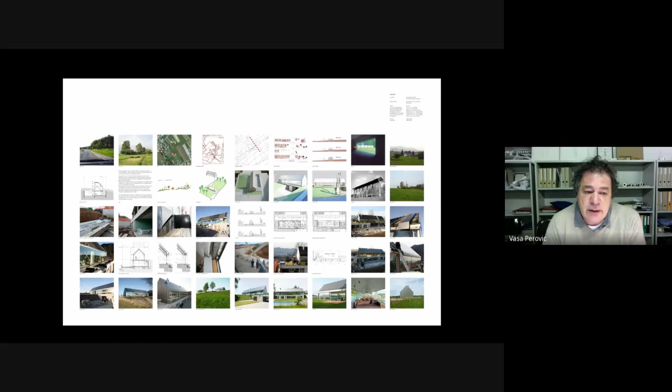For example, in the case of this house, if you see my cursor, there was this series of thoughts we had as we were developing the house, all these references, that we were actually sitting on the site. And here in the lowest right-hand corner there's an email from a person in Alaska asking us for the project because he would like to build the same thing there.

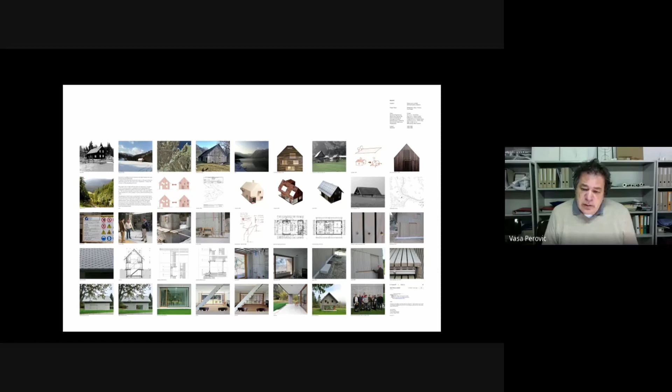So in a sense we were trying to show that the complexity of a project, communicated through a singular image, is much, much bigger than this one single image to which we are confined in the media.

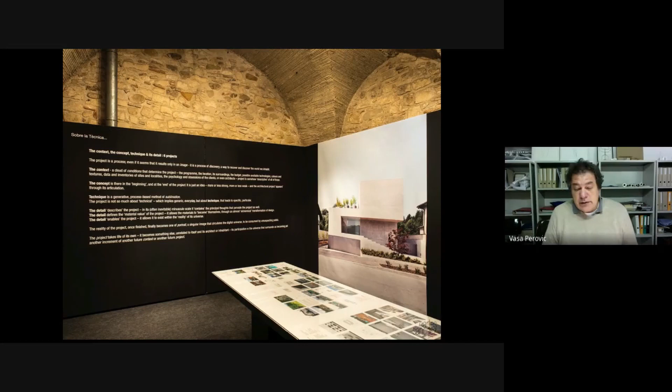On top of that, this is a house on the Croatian coast that we did. We wrote a short text called The Context, the Concept, Technique, and its Detail, and 6 Projects, where we explain our idea of context, concept, technique, and detail, and how they relate to each other and contribute to the idea of producing architecture.

The work of architecture is finally a relatively complex set of relations between these technical things and the atmospheric things that we somehow produce with our projects.

We've run the practice for over 20 years now, 22 years. If I do a little scientific autobiography, in those 22 years we have changed 5 addresses.

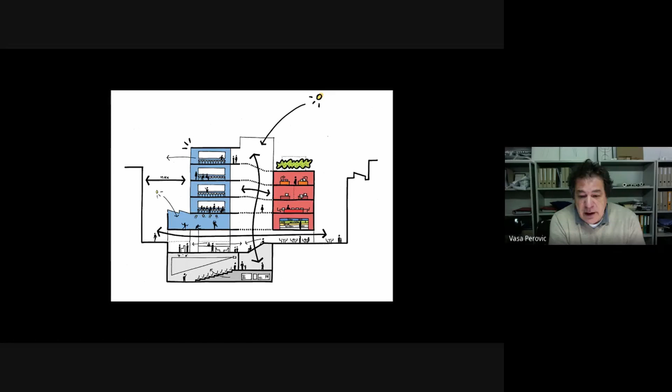It's a building for the pedagogical faculty of the University of Brussels, which has also been finished now during COVID. I managed to dig up 2 or 3 photographs today to show you. It basically consists of a red building, the old brewery building which was a monument we had to reconstruct, and the blue building is the addition. Away from the street level, very much underground, are the auditoria of the new building.

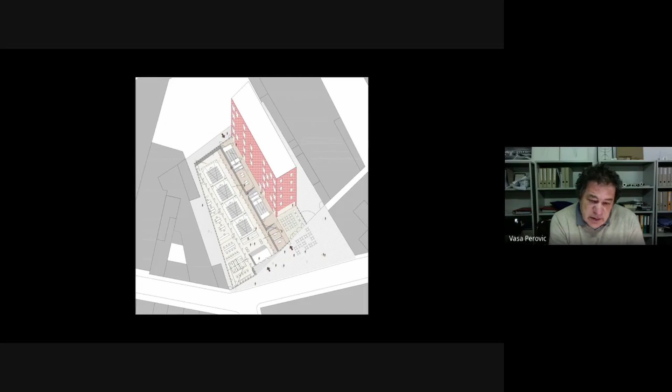The idea of this project was, in a very difficult neighborhood—this is more or less the neighborhood where all of the terrorists in the recent Brussels terrorist attacks come from—to bring the school in as some sort of connecting element within this rough and difficult neighborhood. Here you see the cutout of the ground floor, where the cafe of the school becomes the cafe of the neighborhood, and the complete ground floor of the school is fully open to the street.

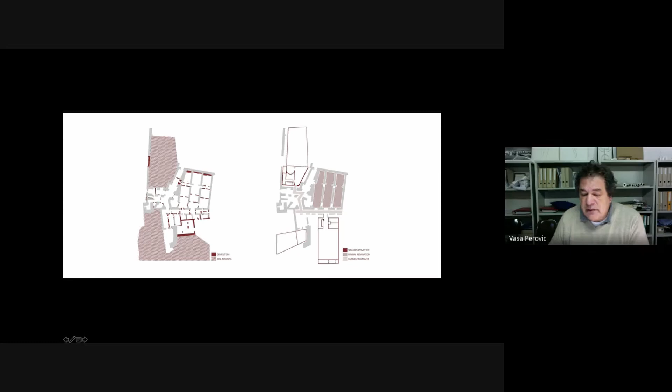On the right-hand side, you see our interventions, where we basically proposed to clean up the medieval constructions, to establish a kind of exhibition spaces, to provide an entrance zone which would help where you would enter from the center of the city, and then to provide a kind of small pavilion and art. It's kind of a Kunsthalle space in the back in the park.

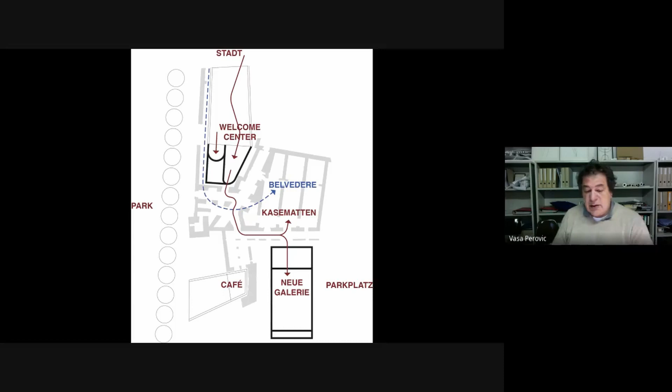So here it's shown in this diagram, because I think diagrams are easier to perceive than the actual plans. From the city you go into the welcome center, then into this underground Kasematten, and then you end up in a kind of Neue Galerie, or this kind of Kunsthalle space in the back.

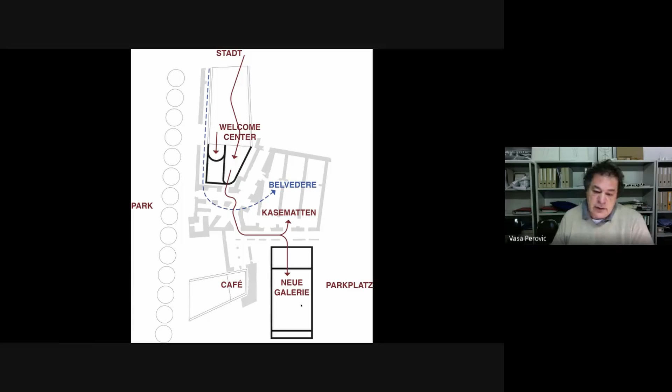At breakneck speed, combining it with the archaeologists on site, we won the competition, and over a period of 1.5 or maybe a little bit closer to 2 years, we constructed the entire project. As the old construction was brick and stone, everything that we added ourselves was constructed in concrete.

So this is the welcome center, so-called welcome center, the entry hall, and the shop that faces the city. There's this sloping surface that takes you into the building, basically from the level of the city to the level roughly 2 meters underground, or 2.2 meters underground, on the level of the old Kasematten.

There is this huge concrete kind of funnel which brings you from the city into this door in the back. This is our office visiting the building when it was opened. It's a concrete construction with this kind of top light. And as you enter into these huge storage spaces in the back, these were the storages where carriages with horses were entering.

So they're actually huge, it's a complete Piranesian maze, an underground maze of these enormous, complete streets covered, formerly underground, now they've become part of the city.

So this is a kind of very large exhibition space. If you see this ugly lamp in the front, that's actually the device that controls everything. As you can see, there are no fire alarms, nothing on the ceilings of this protected space.

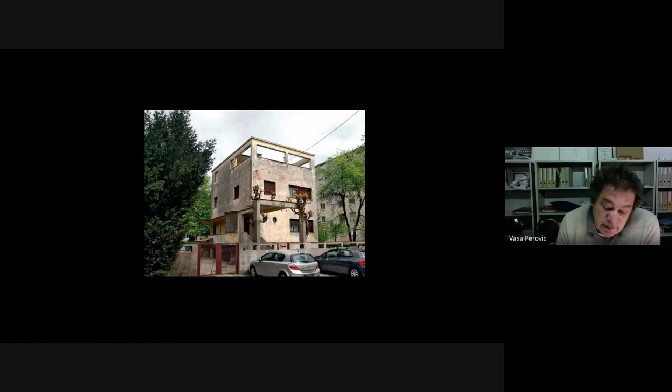This kind of radical example of modernism is one of the most beautiful houses in the neighborhood. So our tests for the site were oscillating in between the traditional villa that we actually demolished and the modernist neighbor that was somehow our referential point.

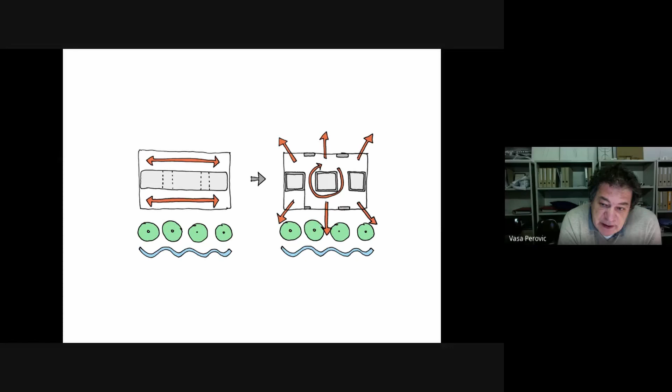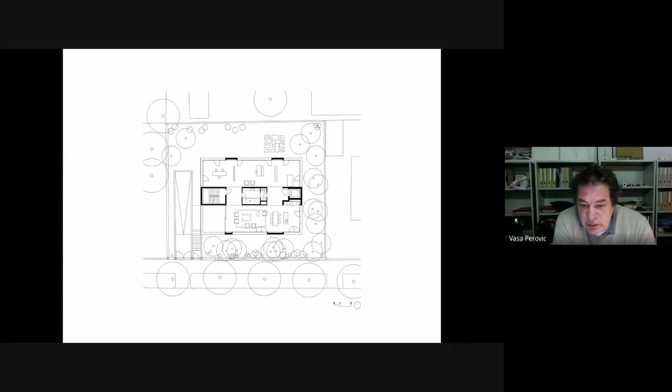In a sense, the building would have this kind of external structure. So the structure of this building is the elevator, staircase, and these 4 short walls, or columns if you want. And this is the floor plan of the apartment. There are no rooms, as you can see. It's just 2 large spaces connected together, including the terrace.

So this is the apartment of Tadej on the ground floor. He has absolutely 0 walls. This is the apartment that I have on the 1st floor, and as you can see, I have a separate bedroom from the workspace, and a space for guests to sleep, and then the living areas on the front. Mattia, my partner, on top, has a kid's bedroom because he has kids.

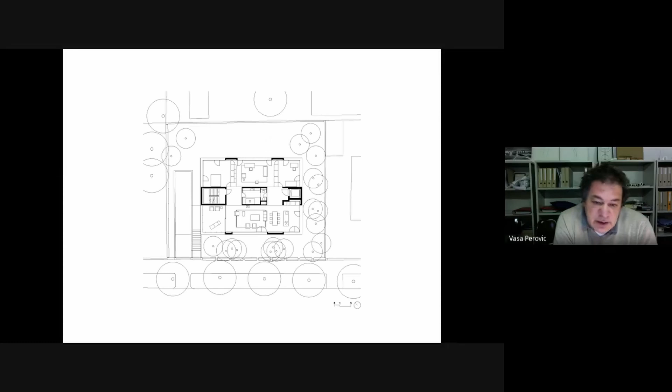He has a kid's bedroom and his own bedroom on the 2 sides, but as a partition element, we have used this kind of cupboard system that we devised for this project. On top, we have a kind of roof, which was supposed to be a common roof, but now is practically used only by Mattia.

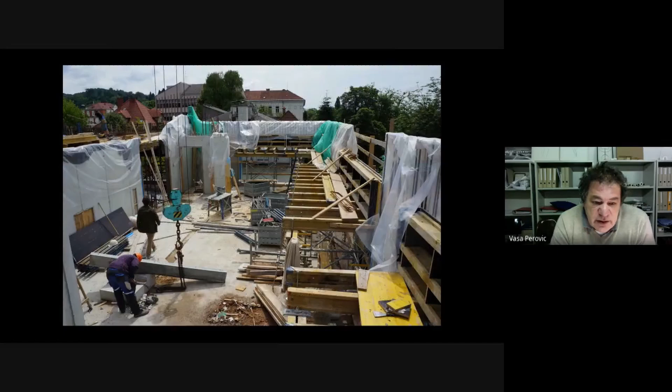Of course, you start from this idea of this kind of perfection of a piece of architecture, where you enter from the basement, but of course the reality of the construction site is a bit more like this - trash and garbage, and a huge effort to construct an architectural idea or statement.

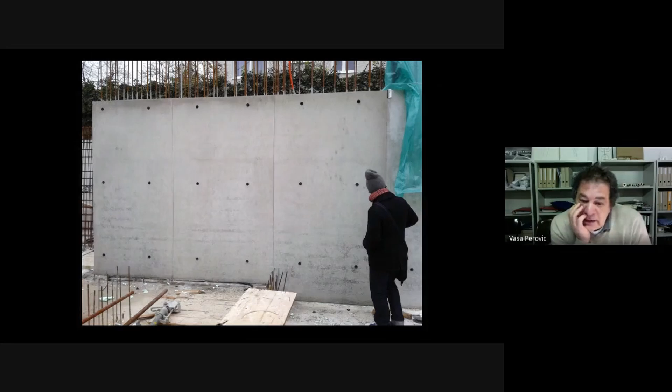This is Mattia inspecting, who has obsessive compulsive disorder, so he's the OCD person of our office. He's inspecting a concrete wall. We did experiments in the basement of the building with different ways of casting the concrete in order to get to the point where we are satisfied.

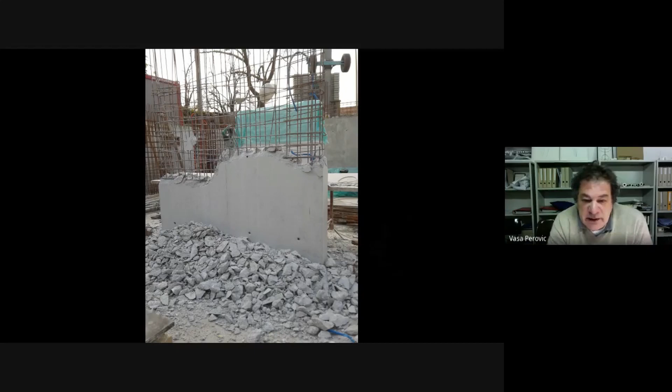And this is how a lot of these experiments ended. So 5 minutes after Mattia inspected it, it was demolished. It was a continuous effort combining demolition and construction in order to construct the building.

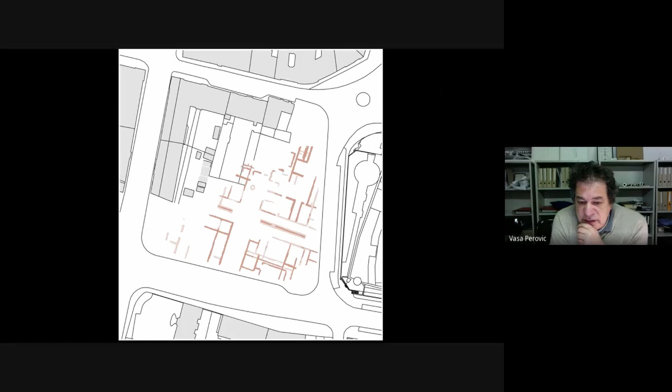You see the crossroads of Cardo and Decumanus in the space where we were supposed to construct a new library. Here you see how our library sits on the corner, and on the right-hand side on top you see Plečnik's library and reading room, which is more or less exactly the same space as the reading room that we have proposed.

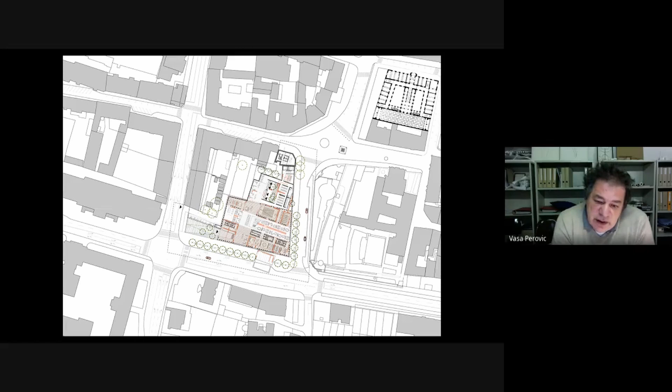What we proposed to the city was not to make a museum of archaeological excavations underneath the new library, but basically to start a new library underground. So to start with two squares, not a defined city block, which bring you down to level -1, the level of the Roman city, and to install the programs of the library into the remains of the Roman city, constructing the entire new building around this idea of Cardo and Decumanus, and around the clashing between the geometry of the Roman city and the geometry of 19th and 20th century Ljubljana.

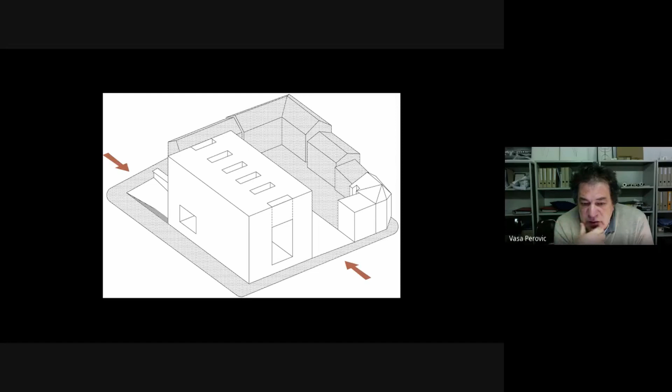So this is what it more or less looks like.

This is the new basement, Cardo and Decumanus, basically the square that folds down and enters into Cardo, and the Decumanus becomes the main reading room of the new library. We inserted the concrete walls and foundations in between the Roman excavations, so they will be completely preserved in situ, and they define the geometry of the new library space.

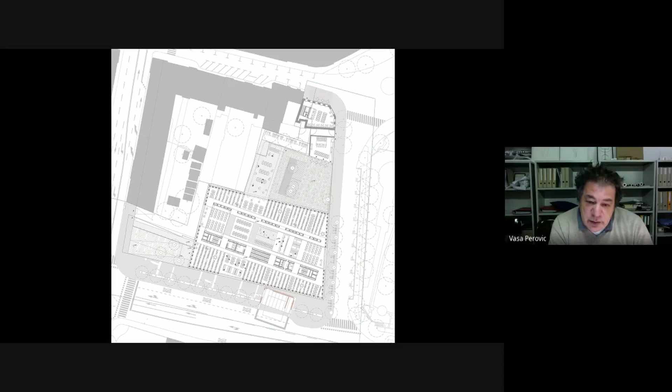This raises a lot of issues because the building follows the regulation of 19th century Ljubljana, while the internal and organizational structure of the building follows the Roman grid. Those two grids create a building with dynamics very difficult to reproduce, or let's say, if you wanted to design them, it would be impossible.

Here a typical floor with the reading rooms and library spaces, and here the section. The top floors are the storage spaces, because you can't dig under archaeology to store the books. Now we are canceling these floors and the technical facilities.

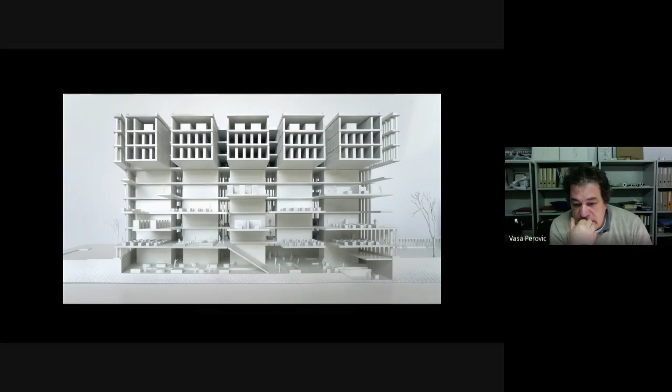You see how the light will come down into this vast new reading room, which is no longer formally defined as Plečnik's, although it's exactly the same dimension, but is more a complex, a bit Piranesian space. We were interested in this work when we were working on this competition.

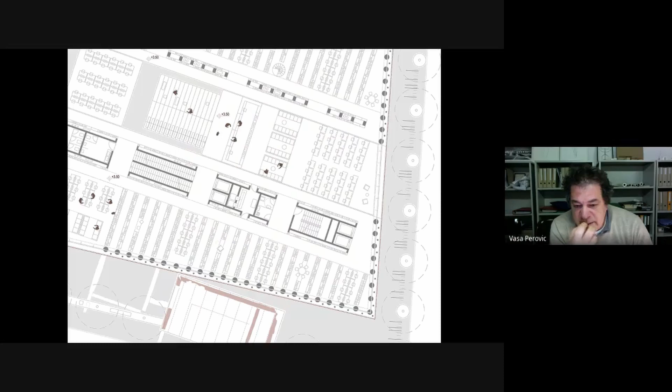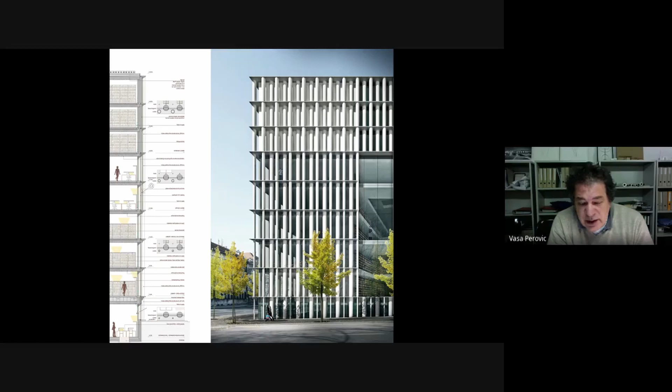The new library is in fact a very repetitive construction of wall-columns, a series of columns which, one next to another, define the structure of the library, falling somewhere down in between the Roman excavations, and also defining the facade and window structure of the library. This dense forest of columns, which creates walls and windows, is going to be at the same time the only structure of the whole building, apart from the two structural cores, and also the facade of the new building.

By diving underground into Cardo, you will actually become part of the Roman city, but also part of the 21st century city. Coming from two different sides, you will always identify this big reading room, similar to the identification of Plečnik's reading room. Here you see how the two buildings are going to relate to each other.

This project is now, of course, what I'm showing you is one of the earlier phases. This project is now in the final phases of design, but especially due to the COVID crisis, I don't know if the government will have money to construct it.

Architect as temporary locals. This is basically the condition we have had since 2008, when we started working outside of Slovenia. We are never really local. We always try to assume, try to understand, try to have a reading of the locality, of the local context or understanding of the local place, in order to construct every single project. It's a continuous amateur-like situation where you are stressed and faced with a situation you haven't seen before.

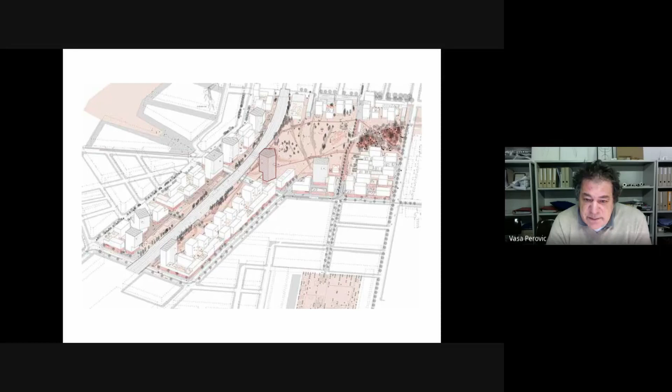So we designed the Snow White, and then there are also however many dwarfs were in the book—7 or 8 or however many—which are the towers on the other side of the railway tracks. We won this. This was a big international competition, and we won it a year and a half ago.

So we wanted to move away from this idea of a generic tower appearance in the city and instead adjust the tower to the kind of views it has over the city. Since it's going to be one of the tallest apartment towers in the city of Vienna, we tried to identify the important views that would be possible from different heights as you go up the building.

We tried to give form to this irregular diamond-like shape of the site—following the diamond idea but orienting it towards particular points in the city landscape. This, in retrospect, gives you the cuts in the middle, allowing us to shape the tower in a way that renders it less intrusive, in our opinion.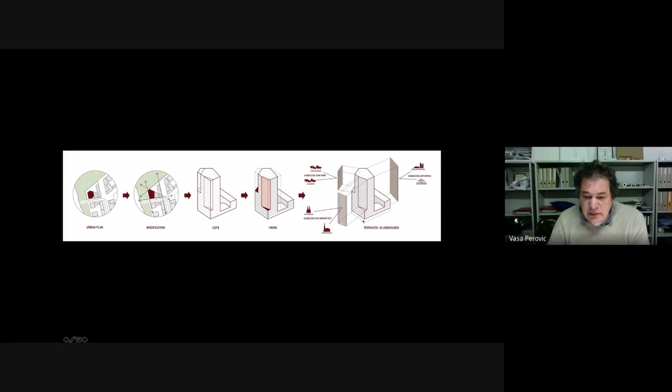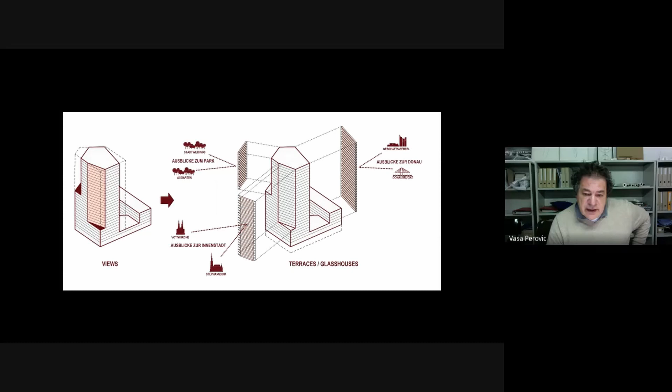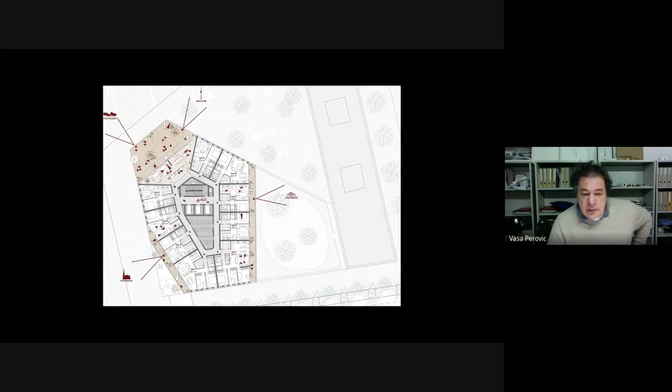The second floor, where you see the pink stuff, is the common spaces of the entire building. As you go up, you start cutting the building, getting more common space each time, and the floor plan becomes smaller as you go toward the top.

This results in a series of very specific apartment typologies. In general they're simple, but also complex as you progress up the verticality of the tower, giving a lot of diversity—the whole building is around 230 apartments.

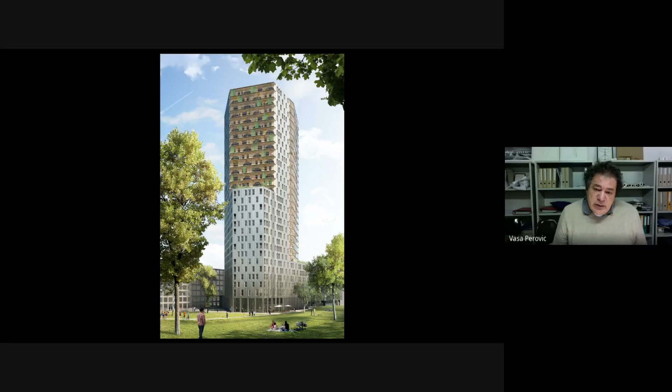This is the way we combine these two different aspects: one is the domesticity hidden in this tower, and the other is a brutal, rudimentary aspect reflected in the repetitive metal facade of identical openings. Every time there's a living room with these big cuts, there are also big arched windows—at the time we won the competition, we wanted to construct them in wood, with large wooden arches projecting the domestic space hidden within the tower toward the views of the city.

And if you turn around the building, the fact that we're changing these facades also makes the building look more elegant and more slim overall.

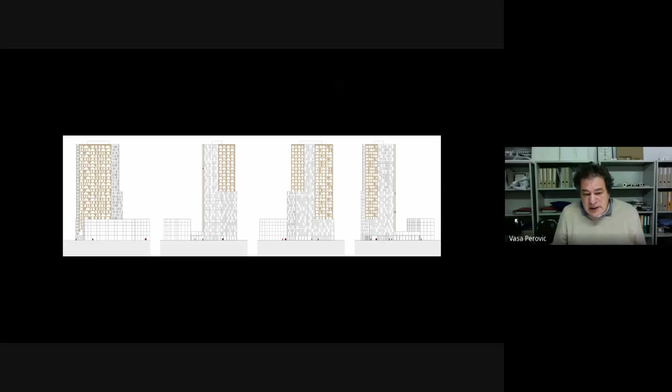So in a sense, you're not going to be so much aware of the massiveness of the entire building, because it's going to be materially broken into two. So here you see how these two different facades somehow come together around this domestic facade, which is basically a series of glass houses.

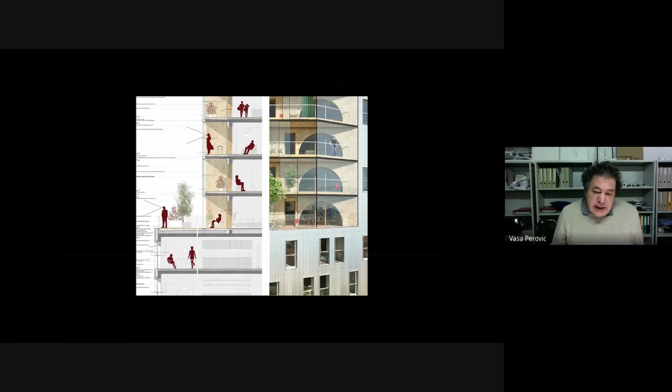Of course, the wood is now becoming a huge problem because of fire regulations, so this is still a theme under discussion. The metal parts were also under discussion because the client thinks it makes the building look very poor. But I think we've gotten to a point where we're going to construct the building more or less with this proposed image as it is.

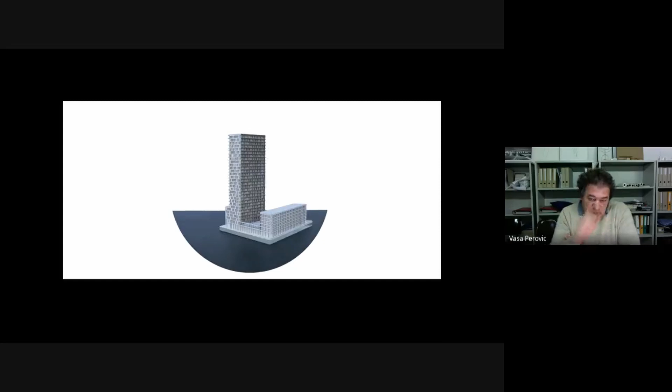So if you turn around, this is the tower. We are not designing this lower building, it's designed by VLST, the urban office that won the urban competition. They got that commission, and we are working together on basically the entire project, with this kind of strange, site-specific or view-specific tower we're trying to construct.

Which brings me to another, maybe final project for today. Another project where, as Henrietta mentioned before, the architect is a permanent amateur as a subject. It has to do a little with what I was saying before, that we need to know a lot of things, a little about a lot of things. This puts us in a situation of being a permanent amateur, which you can see as positive or negative. We try to see it as positive, because Matija and I always enter a project with a very open mind and a research-based mind.

This is a project that took us 6 or 7 years to construct since we won the competition. It was a very big international competition for a mosque and Islamic religious and cultural center here in Ljubljana. It's the first mosque in Slovenia, and probably for a long time it's going to be the only mosque in Slovenia. The Islamic community had been trying to build a mosque for already 40 or 50 years.

When we started design, it was 40 years. Now, when we finished the building, it's almost half a century. And they were always refused for different reasons, even in socialist times.

Finally, they managed, with the mayor of the city who is in a way progressive, to obtain a plot of land very near the center of the city, but in a kind of no man's land. You can see it here, it's an industrial area which is still going to be constructed in the future, stuck between the railways. This is the center of the city of Ljubljana, so very near the center, but also some sort of alienated island stuck between leftovers of infrastructure.

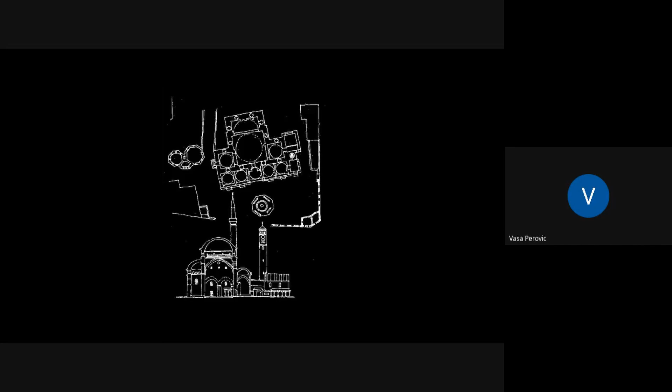There was a historical mosque in Slovenia, somewhere high up in the mountains, constructed in 1916 because a lot of Bosnian warriors were fighting in the First World War. For a long time it has disappeared, but you see it's some sort of a merger between a traditional house at the bottom and the mosque on top. So in a sense, something that already at that time tries to bridge the cultural divide between the.

There was also a Slovene architect studying in Prague, Czechoslovakia, named Dušan Grabrijan, who researched a lot of this Islamic architecture and compared it to the Corbusian approach of construction of space in modernist projects. These were all the influences that brought us to construct this kind of new mosque complex as some sort of a center open to the city, but still separate from it, that would invite different construction to happen around it over time.

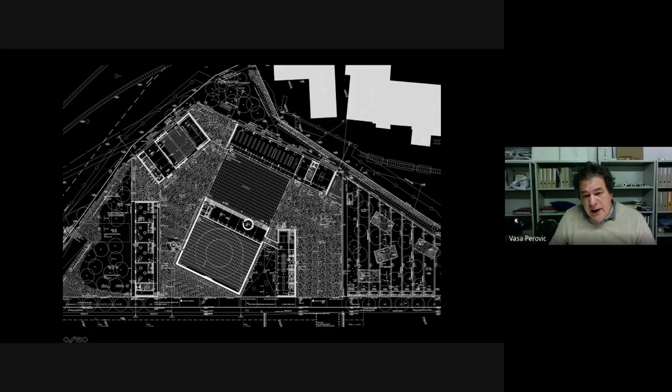This is the space of the mosque, and this is the direction of Mecca. There's a little kindergarten on the ground floor of the building reserved for apartments, a lecture hall on the ground floor on top of an office building for the Islamic community, and a school building which on the ground floor has a big Islamic library and a small shop space.

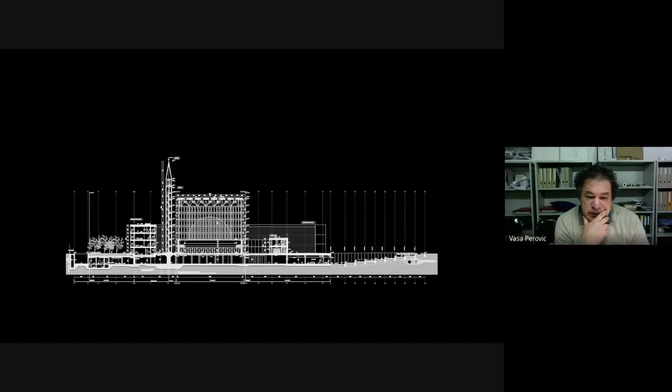On the right-hand side you see this kind of sloping park. In section, the park slopes under the level of the ground, and this is the restaurant. We wanted the restaurant to be a bit separate from the program of the mosque, because we thought it would be very weird to go eating on the square of the mosque, to go eating kebabs.

We placed the minaret as the symbol of the mosque as a separate entity next to the mosque, because the height allowed by the city was only 40 meters, and we thought that if we attached it to a building, it would look too much like a chimney.

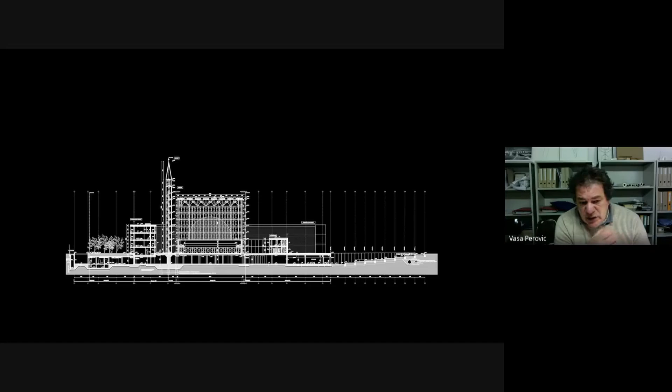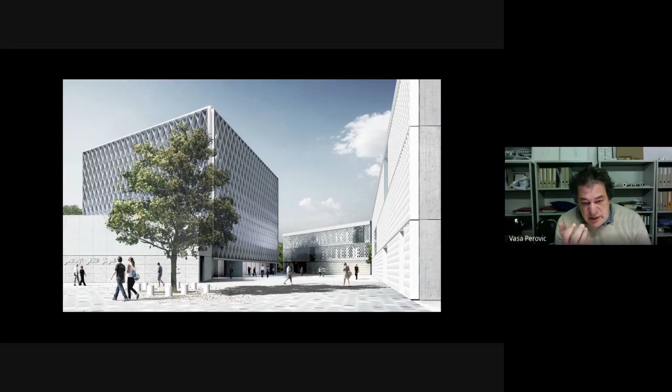This was what we thought we were going to construct when we won the competition - a very large exoskeleton which inside holds the glass elevation of the building, so that the interior of the mosque feels like a plaza, because the whole situation is reversed. You have the facade, the glass facade, which faces the interior. And then there was this idea that we're going to suspend a textile or silk dome inside this mosque.

We wanted the most important element of the mosque to be the lightest element. There are tons and tons of construction material, but the weight of this textile is maybe only 65 kilos or so, and of course there is a structure for it, around another 600 or 700 kilos. So we wanted the most prominent element of the mosque to also be the lightest.

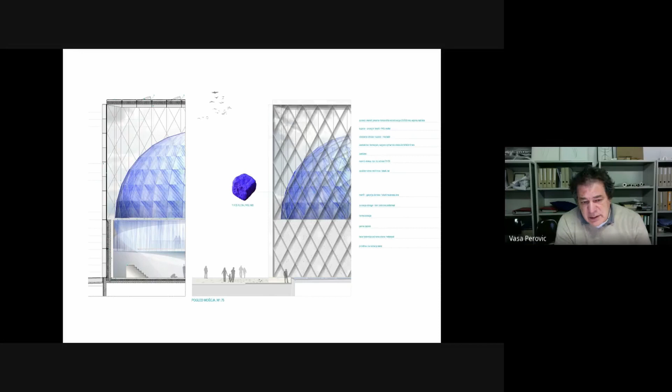So all of these were influences where we were trying - this is also a render from the competition - to produce this kind of ethereal atmosphere of something incredibly light floating above the space within this construction.

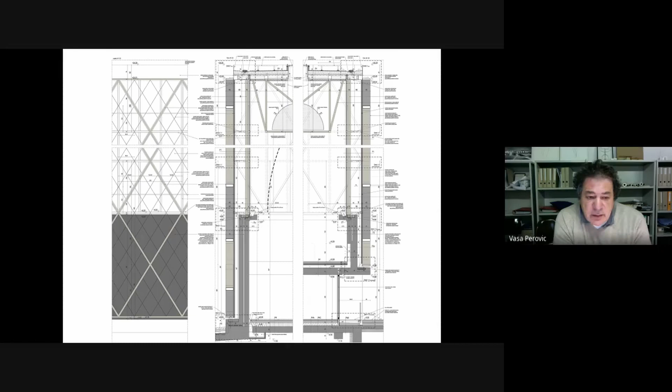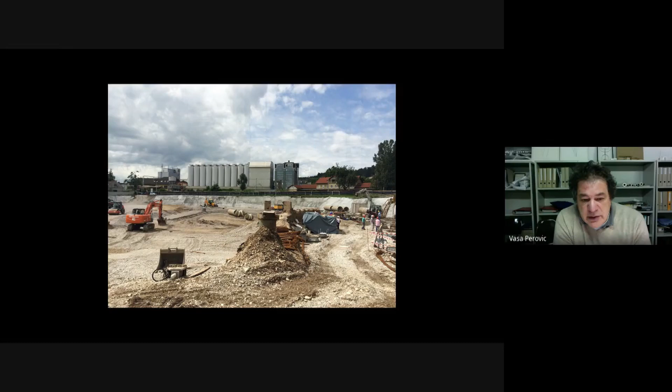These are now the construction details of the actual construction. There were, of course, in this process, quite a lot of compromises - the structure of the exterior of the building was changed radically. And again, there is this process where we started constructing something we thought was aiming to become sublime in the middle of the super industrial neighborhood, in all this dirt and shit of the industrial city.